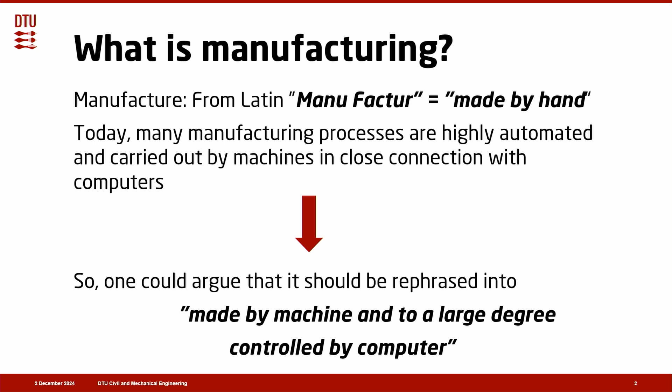Today, the title of my thesis is Multiphysics Modeling of Manufacturing Processes. And you might ask, what is manufacturing? Well, it comes from Latin, manufactur, which means made by hand. But today, you could say that many manufacturing processes are highly automated and carried out by machines in close connection with computers. So one could argue that it should be rephrased into made by machine and to a large degree controlled by a computer. So if we look at the overall manufacturing chain, we have the materials coming in to the left.

We have the factory or the plant, and then we have our final products. That's actually the overall value chain. In the factory, we have a series and chain of manufacturing processes composed of single process steps. And what we're frequently interested in is the correlations between what we can control, the process parameters, what we can measure, the process signature, and the final product quality. So it's all about getting those correlations to get the right products.

But it's not really only the correlation, it's also the causation. And for sure, there is a difference. This is, you could say, illustrated by this very nice figure. What you see here is there is a correlation between the worldwide non-commercial space launches that correlate with the amount of sociology doctorates awarded in the US. So when one goes up, the other one goes up. When one goes down, the other one goes down. So there is a correlation. So it could be tempting to say, okay, well, if we want more PhDs in sociology in the US, we just need Elon Musk to send more non-commercial rockets into space.

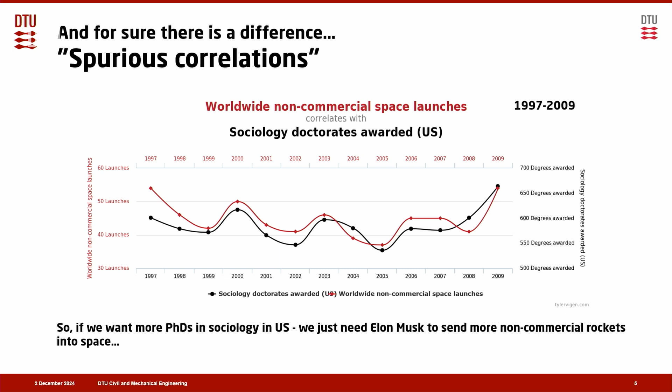That would be utter nonsense, because there is no causation. So the real aim is actually causation, but based on the knowledge of the correlation.

So mathematically, this is actually an inverse problem. What you see here is that the production goes from left to right. You have the raw material coming in, you have the production, and then you have your final product. But the design process goes from right to left, because you know what the product is actually.

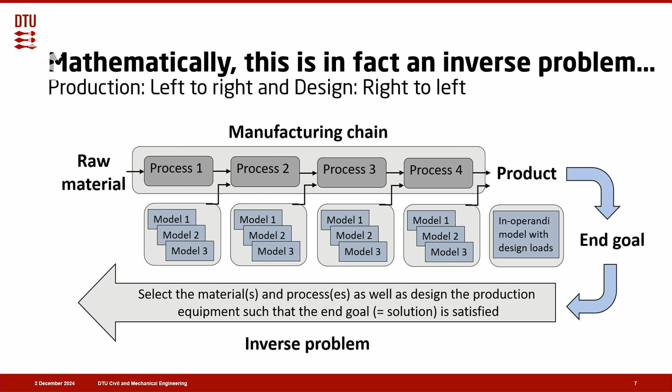Let's do it here. Is it able to point? Yes. We know what the end goal is, but we don't know how to make it. So when you design something, you know what it's supposed to do, but the inverse problem is to select the materials, the processes, as well as design the production equipment so that the end solution is satisfied. And that is mathematically an inverse problem, and that's what makes it difficult.

So what is multiphysics? That was manufacturing, now it's multiphysics. Well, it's numerous physical phenomena often taking place simultaneously in a coupled manner. So what you see here are some well-known examples of relevant physics.

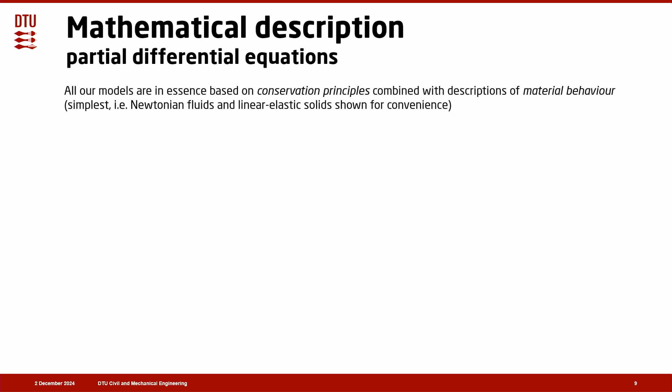So how do we solve this and model this mathematically? Well, we use partial differential equations. Partial differential equations are based on conservation principles, that is, in essence, balances together with descriptions of materials. So we have heat transfer conservation of energy, we have fluid flow conservation of mass, momentum, energy, and in solid mechanics, that's simple force equilibrium.

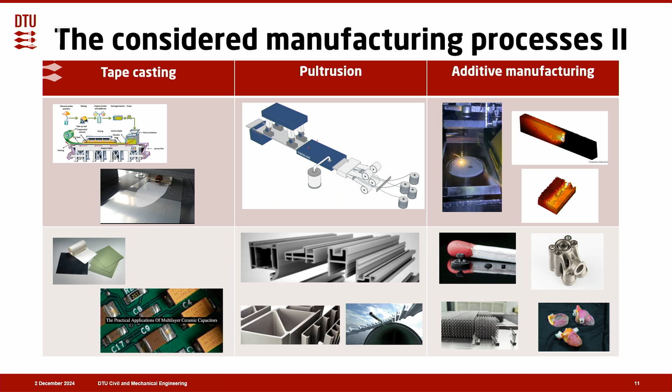Then we have tape casting, that's used for tapes used in the electronics industry. We have pultrusion, with some products below there, some profiles, and then you have additive manufacturing, also known as 3D printing, with some examples below there.

So how do we go about modeling this? Well, we use analytical and numerical methods. You start out with the partial differential equations, plus a lot more. Then you have analytical solutions with paper and pencil. You get some formula, you get some curves, and then you can actually derive whether it works according to how it's supposed to work. We also do numerical methods.

This is what this is about. There you type it, or you could say program it into a computer. You get numbers, and lots of numbers, that's why it's called numerical. And then you get curves and plots as well, but they are much more general than the analytical ones.

That's in essence what we do, and then we get tons and tons of equations that we solve, and then we can get the curves and color plots and so on. Something we always have to do is verification and validation. In verification, we ask the question: are the equations solved right? The only way we can test that is to compare with a well-known analytical solution.

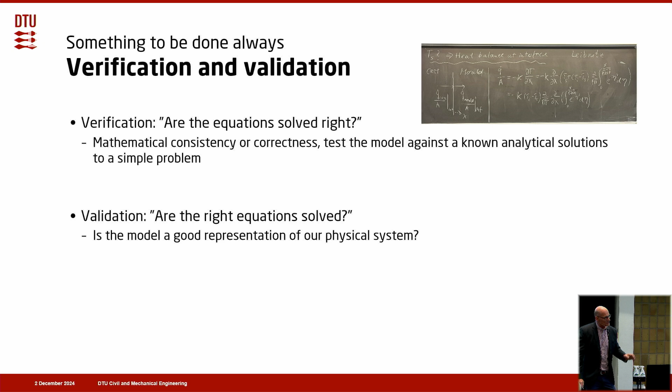We could predict the centerline porosities, and to some extent the segregation, using this kind of simplified model. People would know that solving Navier-Stokes equations is for sure not simplified, but this was at a scale where these phenomena normally don't take place, so it was actually simplified.

Then we did a multi-objective optimization problem where we wanted to get rid of those centerline porosities, but also make it more energy efficient. So we found the optimized layout. The weight of the molded material went from 60 tons to 46 tons. It was a success. It was test cast, and it showed no defects.

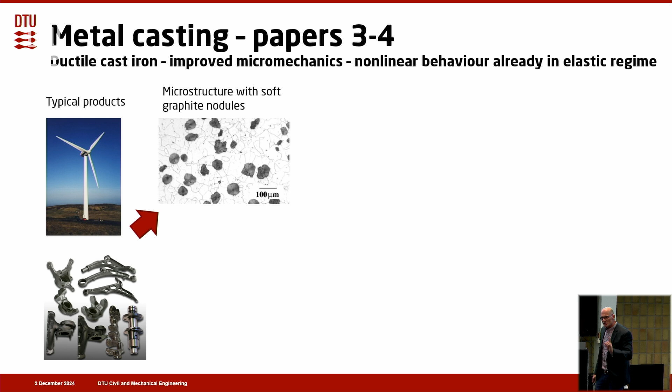The next two papers were about ductile cast iron and improved micromechanical models that could somehow address the nonlinear behavior already in the elastic regime. Here you see some examples of ductile cast iron. The microstructure contains soft graphite nodules, which are there for castability, but typically you don't assume they can carry any load because they're soft. So you just assume they are holes when you dimension the part.

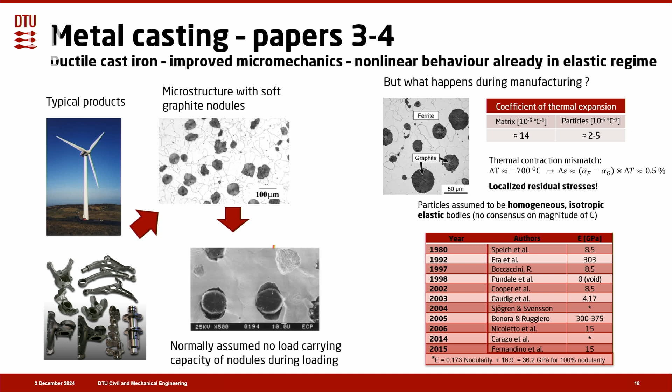But the point is, what happens during manufacturing? Because you have different thermal expansion coefficients of the nodules and the surrounding matrix, you get localized residual stresses, which is important for how it carries load afterwards. So people would normally look at those as homogeneous isotropic elastic bodies, but there was absolutely no consensus in the literature as to how to model the Young's modulus. You see it goes from 0 to a lot, and that's a big variation, I would say.

So what we did was look into the literature and examine those nodules. We found out they're not isotropic, but composed of conical sectors made of platelets. We proposed several divisions into conical sectors, and then we did a unit cell approach. This was our first model.

Making a more advanced model, we did a macroscopic casting simulation in MagmaSoft to get the cooling history, which is very important for the residual stresses. Then we imported the real structure from the test specimen, applied the loading history, and did a cross-section loading simulation in Abaqus. With that, we got a much more realistic description.

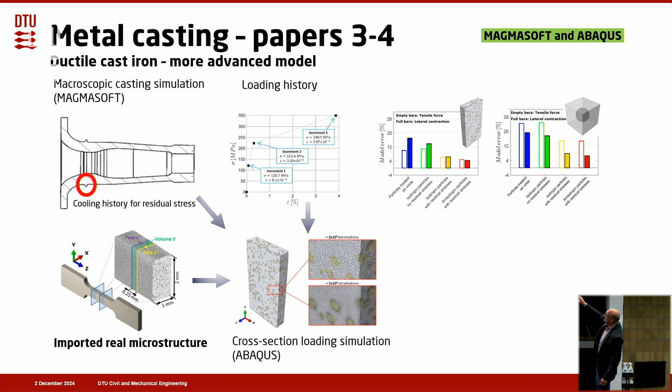So you can see here, if I can get it to work... Okay, anyways, you can see the figure to the left, the two reddish ones, they are around 3 to 4% from the experimental values, and this was with the advanced model.

What was really interesting here was that we could then provide the first theoretical explanation for the nonlinear behavior already in the elastic regime for this material. So you needed to look into the micromechanical behavior of the material to say something about its behavior macroscopically when loaded in real life.

So the next process was spray forming. Spray forming is a process where you have a melt, it's atomized, you get a lot of droplets, and then you build a billet.

With this, we could predict the temperature during flight, solid fraction over distance, as well as compare with experiments from secondary dendrite arm spacing. So this model was just the atomization model.

And we needed to account for shading with various geometrical considerations as well. That was rather involved at the time. And then we had this coupling between atomization and deposition.

You see some results here, building a Gaussian billet. This is where you have the atomization point right above where you build. Then you just get a Gaussian billet due to the distribution.

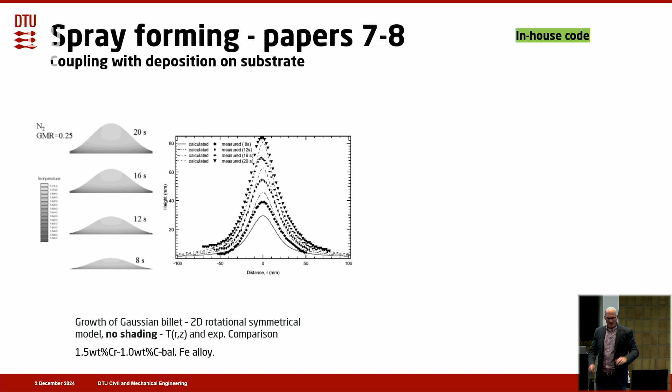Then we finally, in spray forming, did a model in OpenFOAM, which was a more advanced CFD program, where we looked at the calculation domain relatively close to the nozzle positions and looked at both primary and secondary breakup. Then we could make a simulation like this, taking turbulence with a k-epsilon model into account. This was a substantial improvement as compared to the literature at the time.

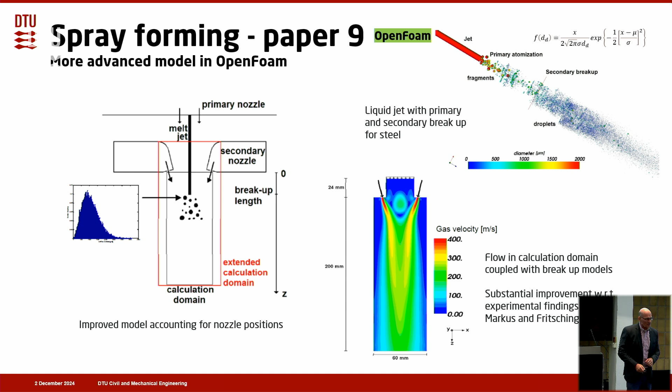Now we come to friction stir welding. That was this process where you have a rotating tool. It's a mechanical welding process, and then you weld the two parts together. Here you have an indication of the friction stir welding process.

We did a very fundamental analysis of the heat generation at the surface of the tool and the shoulder. Nobody did that in literature before at the time. So we defined a state variable: it was 1 when there was sticking, because the interface condition is extremely important, 0 when there was sliding, and in between a combination of the two.

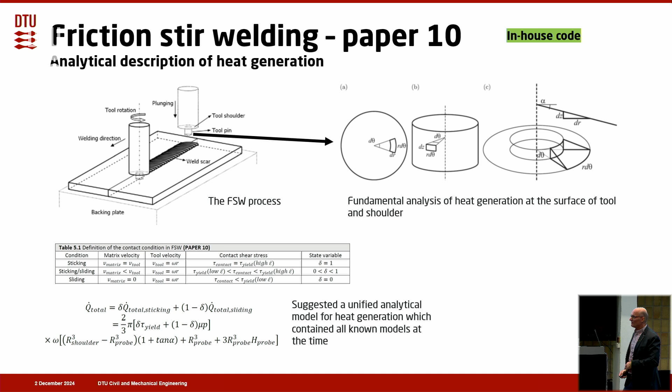And then we derived this analytical solution that was a unified model, and it actually contained all the known analytical solutions as special cases at the time. This was kind of taking them all into account because it was a much more general formulation. It was experimentally validated, and that validation suggested a close-to-sticking condition.

Then we did a CFD model. CFD, computational fluid dynamics, it's something with flow, right? And you might ask yourself, how can you make a CFD model for a solid yielding material? It's not flow. Well, it is flow in the sense that it's so soft that it flows.

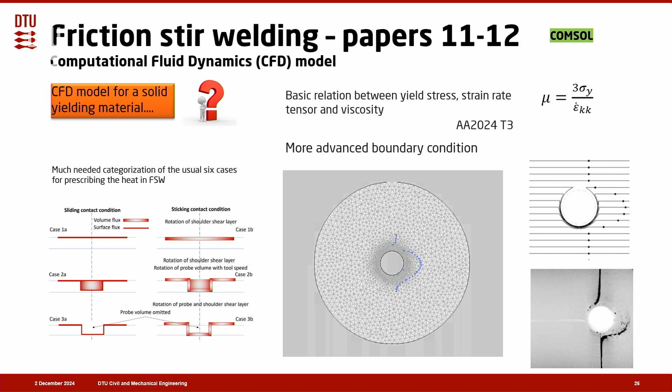You have the rotating tool, then you have the material coming to it. And then you see some tracer particles being swept around the rotating tool, and we can compare with experiments, and we found quite nice agreement.

Then we went to thermomechanical models. This is a classical quasi-steady state thermomechanical model with a moving heat source. This is quite standard in welding, you could say. But the trick here is actually to find the heat source, really to calibrate it.

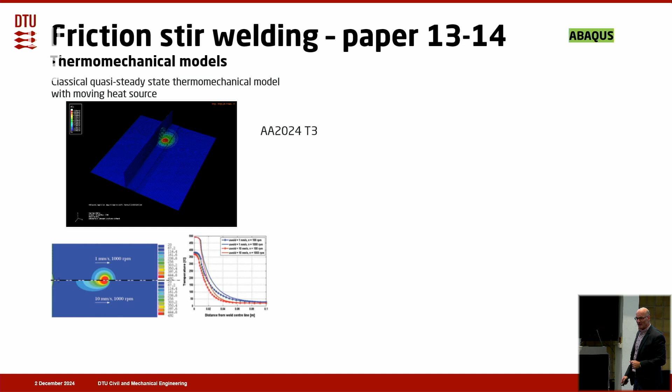So with this, we could make parameter variations where we varied the welding velocity as well as the rotational velocity. We could look at temperature fields, this is what you see here. And we could also look at the longitudinal residual stresses as a function of the choice of these process parameters.

These models are actually multiphysical. That means that they take a lot of calculation time. They are complex. So we tried to think, okay, can we make a simpler model? And then we suggested the thermal pseudo-mechanical model.

This way we bypassed the multiphysics, and instead of making an experiment so we knew the total heat generation, we tried to make it based on material information instead. So we made a model where the temperature-dependent yield stress was controlling the heat generation.

There is still some mechanical information in the model, but it's only a thermal model, which means that it calculates extremely fast. So we got almost the same calculation time as just prescribing the analytical heat source, but then we avoided temperatures over the solidus temperature, of course, because then it switches itself off.

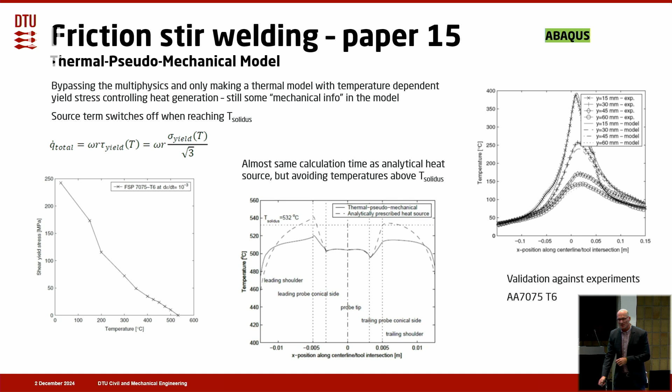And then we did some validation against experiments, and there was actually quite nice agreement.

So in friction stir welding, we also looked at the effect of softening on residual stresses. This was the quasi-steady state mechanical model I showed before in Abaqus. And we used a simple softening model by Myhr and Grong. It's based on dissolution of hardening precipitates.

And of course, the softening was obviously taking more effect during the hot conditions. That is, of course, expected.

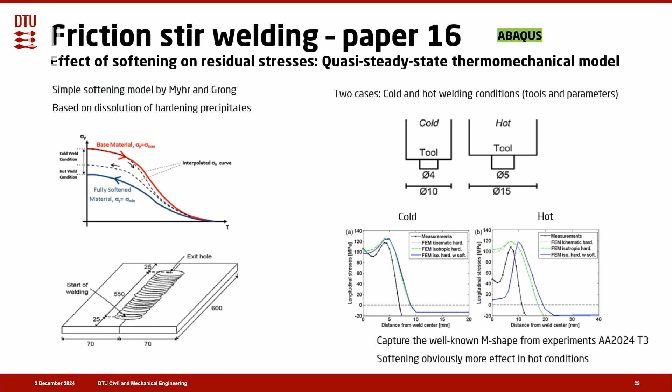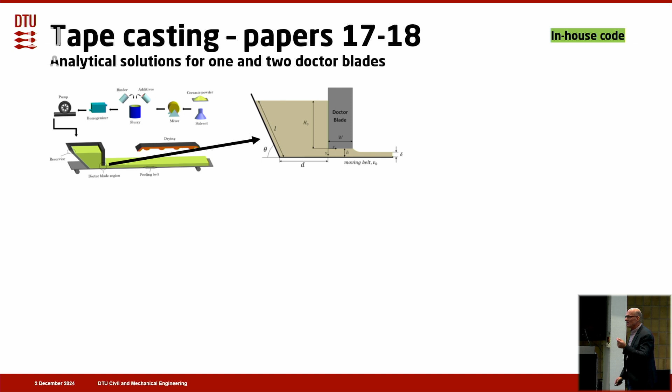What you're frequently interested in here is the thickness of the tape, because you want to control how thick it is, and that thickness you can actually calculate if you know the velocity field. Because if you know the velocity field, you can use the mass balance, the continuity equation, and then you can find the thickness.

So what we did was that we suggested a steady-state velocity field solution for a power law fluid. In literature, at that point, it was only Newtonian fluid that was suggested. So we looked at a power law fluid, suggested this. But what we also did was that we augmented this.

So it became a quasi-steady-state velocity field when the fluid height decreases. Because when the pressure height decreases, it will change the velocity field. So this we suggested as well, and that was really the novelty of that paper.

And we could actually get very nice results as compared to experimental findings. We also looked at two doctor blades, because with two doctor blades, this is actually where you can better control the height of the reservoir. And then we gave some contributions to the literature with the velocity field, also for a Bingham fluid.

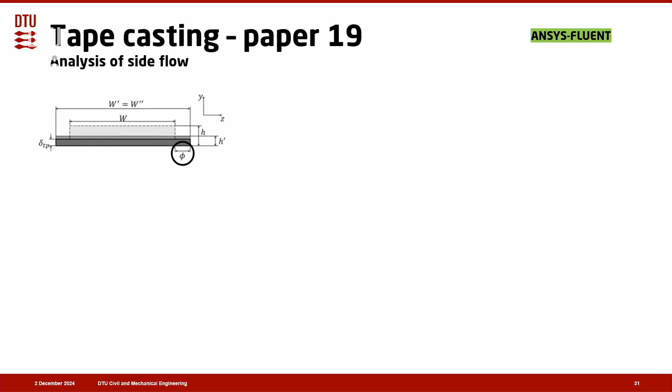We also looked at the side flow. A lot of people in literature talk about the side flow. So when it's flowing out of the tape caster, it flows a little to the sides. Some formulas were given in literature, but they were never derived. So we thought, okay, people were using these, but never told why. So we just made a small analysis as to why it actually looked like this.

And then we used a 3D CFD model in ANSYS Fluent to actually simulate the side flow. We compared against experiments for the side flow as a function of substrate velocity, doctor blade height, and initial slurry height. And we found very nice agreement.

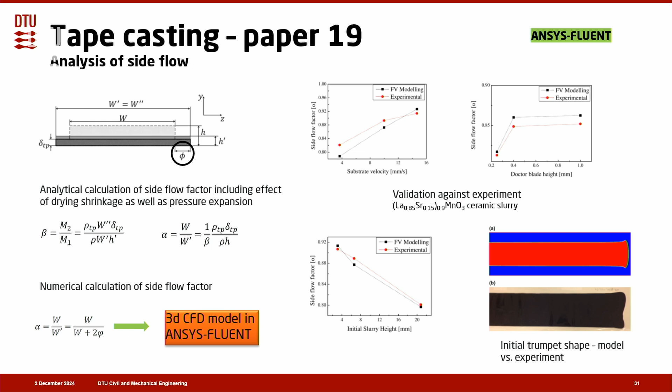And of course, it flows to the sides very much in the beginning because there is a free boundary very close. And then the final paper in tape casting was a simple drying model in 1D that was emulated by the water-ceramic system.

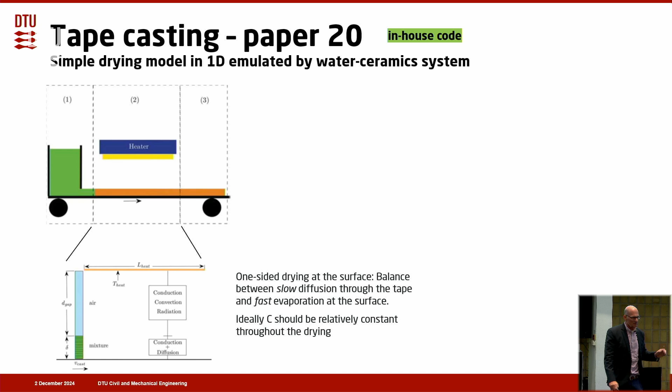So if you see here, the drying with the blue heater, the point is that it's one-sided drying at the surface. So it's a balance between the slow diffusion through the tape and the fast evaporation at the surface. And ideally, you would like to get a more or less constant concentration throughout the tape.

This is, of course, not possible, but you would like to at least get there to some extent. So we made a simple model for the heat conduction equation in 1D. This is what you see here, very simple. Then we got some temperatures. And then we also realized that the diffusion coefficient for the dry skin has a much lower diffusion coefficient than the wet material. Combining that, we could solve Fick's second law, and then we could get the concentration profiles through the tape for fast, intermediate, and slow drying.

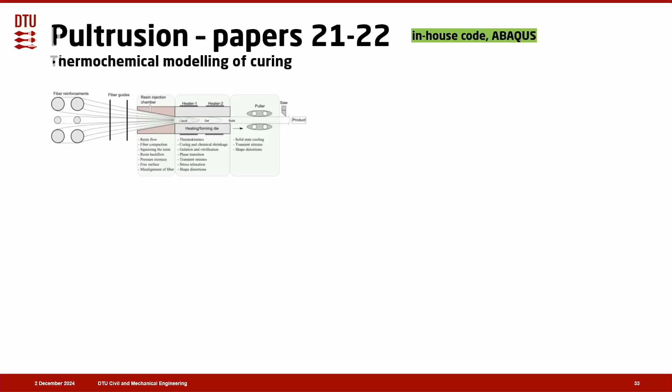Getting to the next process of pultrusion. Now, pultrusion is a very interesting process where you have fibers coming into a die, you add resin, and then you cure it, you kind of heat it, and then it hardens. And then out comes some profiles.

So we started with a simple 2D rotationally symmetrical model where we found the centerline temperature as a function of distance, as well as the degree of cure. And the degree of cure is how hardened it has been. That has to be around 0.9 or higher.

Then we continued with comparing some different solvers from literature, ADI, transient, implicit, steady state, and so forth and so on, to see what was the most efficient from a computational viewpoint.

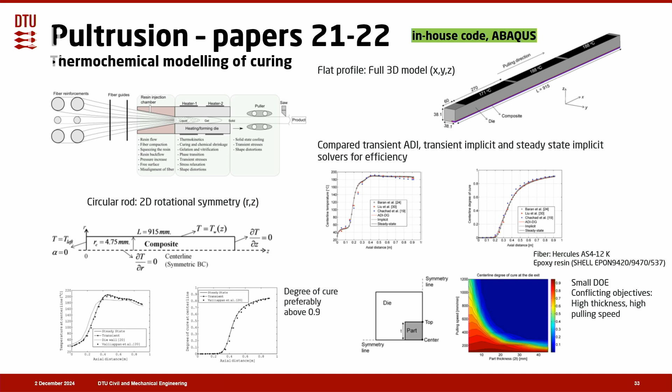And then we did a small DOE where we looked at how fast you can actually pultrude a part if you want to make it as thick as possible, but pull as fast as possible. And pulling fast, of course, increases productivity. But if you pull fast, it doesn't have sufficient time for curing. So, of course, these are conflicting objectives, and then we made this, you could say, optimization curve.

Then we went to the very first in literature thermochemical-mechanical model of pultrusion. Nobody ever did a thermochemical-mechanical model of pultrusion before, so we took the model from before, and then we took a 2D plane strain cross-section moving through the die.

Then we continued and said, okay, well, this was a plane strain. A plane strain assumption means that you get longitudinal stresses that are very high because they're constrained. So we looked at a generalized plane strain as well as a 3D model.

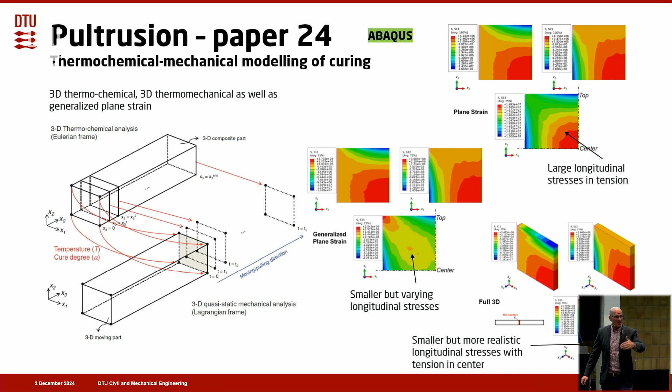And then we went to 3D. And here are smaller but more realistic longitudinal stresses with tension in the center. So if you want to look at not only in-plane stresses but also longitudinal stresses, the 3D model is probably preferable.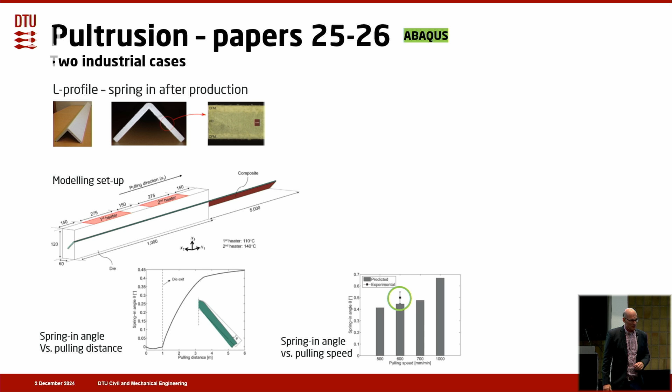So we could really use this thermochemical-mechanical model for predicting final deformations.

Finally, in pultrusion, we did a 3D steady-state thermomechanical model. The other models were transient, meaning time-dependent, which takes a lot of calculation time. So it's not difficult to make a steady-state model for solving temperatures, but it's more difficult

for making a steady-state model for solving stresses and strains as well. We were inspired by people from welding who did this before, and we integrated deformation rates along streamlines to get final deformations. This model showed the same accuracy as the 3D transient thermomechanical model I showed before, but it was calculating much faster.

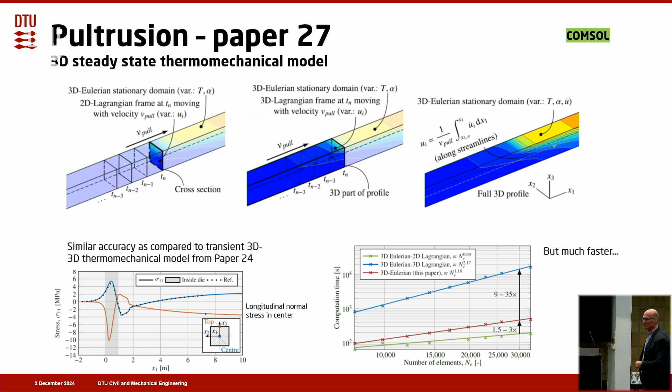So if you want this steady-state situation in pultrusion, and this is what you often want because it's a steady-state process, then you should definitely go for that. But if you have startup or stopping problems that you want to analyze, then a steady-state model is not sufficient. Then comes the final group of manufacturing processes: additive manufacturing, also known as 3D printing.

In the beginning, we made a simplified model for optimizing the scanning strategy of a 3D printed rod. When you 3D print, you have a laser, you melt some material, and then you cut it from the base plate. This was scanned using typical classical scanning, back and forth in squares or lines. You scan, scan, scan, scan, and then you cut it, and how does it look? It bends.

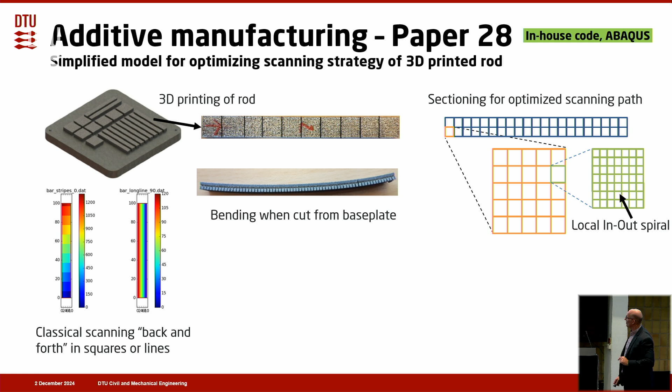So when it's cut from the base plate, that is of course a problem. So we thought, how could we actually scan in another way so that it didn't bend? We sectioned this part into different levels, and at the green levels there, we used the so-called local in-out spiral scanning strategy with the laser.

We made a simplified thermal model and compared it for the local in-out spiral with an advanced model in Abaqus, and we saw quite good agreement—not the same, but relatively good. Then we could use that optimized solver to ask the computer: please tell us how to scan.

Instead of just scanning like this, which makes it bend, please tell us how to scan so it doesn't bend when it's cut off. The one below the bending one was the one with the optimized scanning path, and it was as flat as when it was not removed from the base plate. That was because we could optimize. Not surprisingly, the optimized scanning path was scan a little here, scan a little here, scan a little there—this is called island scanning, because then they can contract independently instead of one long rod contracting like this and then like this. So it was not a surprising result, but it was still a very interesting one.

But this called for a lot of dedicated experiments, so it's not a general procedure. You could say we substituted some of the complex partial differential equations with empirical knowledge that we put into our reduced order model, which means it starts getting problem dependent. We probably could not have done that for a very advanced 3D geometry—we'd need to run all the experiments again and so on. That's why we moved away from this, but I think it deserved mentioning because it was a really nice optimization case.

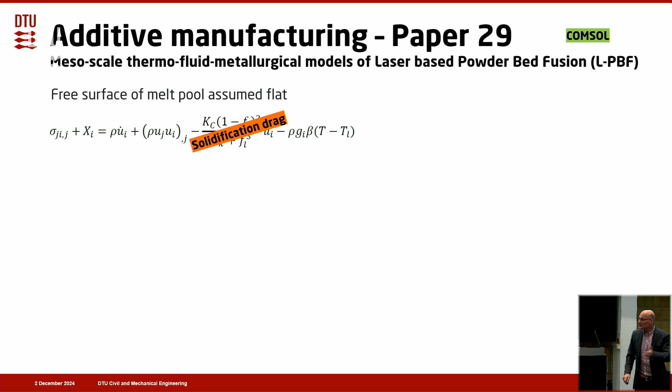So what we continued with was a mesoscale thermofluid metallurgical model of laser powder bed fusion. Here we have the momentum equation. We assumed the melt pool surface was flat, and also included the solidification drag and buoyancy. We suggested a new conical heat source distribution and could calculate melt velocities and temperatures. We compared and validated against a melt profile from literature, and got very good agreement.

We also analyzed the effect of excluding convection from the melt pool size. Of course, if you exclude convection, you don't have as much cooling as if you include it, and therefore the melt pool size increases when you only have conduction.

Then we proceeded with a mesoscale thermofluid metallurgical model. Again, it was actually the one from before, but we used it in another case where the energy intensity is higher. So this is where you get the keyhole regime.

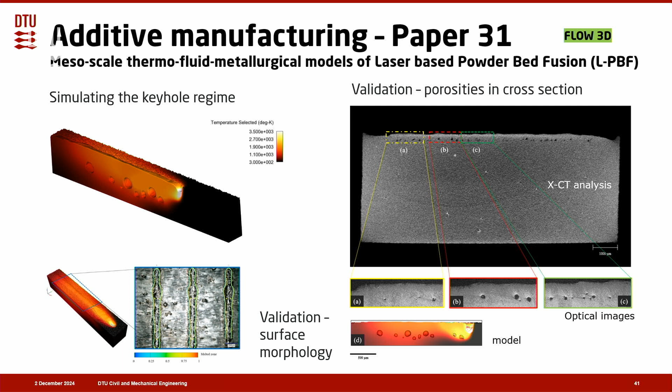Paper 32, coming to paper 32, was a part-scale thermomechanical model. Here you look at a 3D printing of one of these plates here in the corner. That's a rectangular plate. You have the actual scanning. And then what we used was a flash heating.

This is where you lump a lot of layers and activate them at once. This means that the calculation time is highly reduced. And we also suggested the so-called sequential flash heating. This is where you get some information about the scanning strategy taken into account. This also suffered from bending when it was cut off from the building plate.

So this is the simulation of this. And we could see here that when we used the flash heating, we got something that was almost rotationally symmetrical. But when we used the stripes in the sequential flash heating, we got something that was closer to the experimental results that was this. This was the one that was closest, of course, because it had the highest refinement.

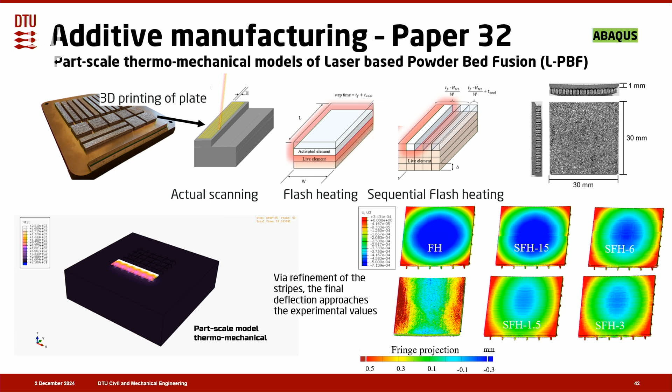So via refinement, we get better results. That's not surprising.

Then we looked at a cantilever beam that was heat treated. So we wanted to see the effect of heat treatment before removal from the base plate. We did a validation of the additive manufacturing simulation simply by just comparing the tip deflection of the measured part with the simulated part.

And they were quite good, so we used that additive manufacturing simulation for taking and transporting the residual stresses into the heat treatment simulation. And the heat treatment profile looked like this, with these material properties.

And these are the deformations after printing if you don't heat treat. And these are the deformations after heat treatment if you do, yes, well, heat treat. So we compared this, you see here, the tip deflection.

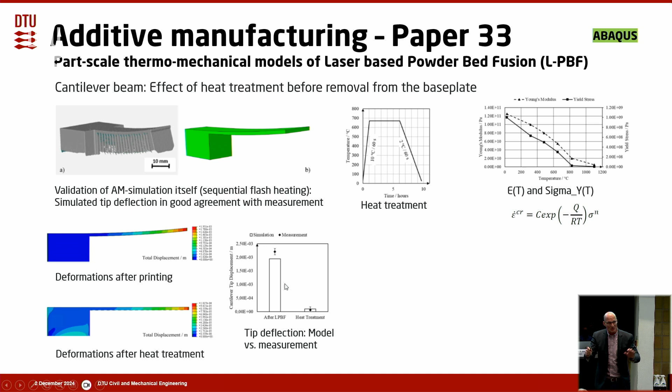This is after printing, and this is after heat treatment, and what you see here is the experimental finding, and we actually had a very nice agreement, and were able to predict that.

And then the final paper, I can assure you, so there's not that much left, paper 34. There we did a mesoscale thermofluid model of direct energy deposition, a somewhat other, you could say, additive manufacturing process.

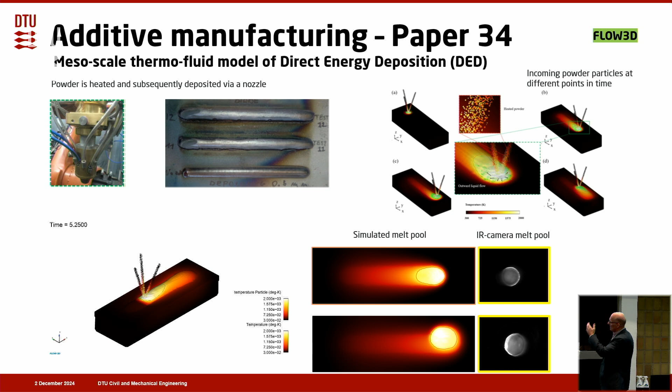This is pictures of the simulated melt pool. This is the infrared camera of the same.

And you see here at the bottom, you actually have made one scan, and then you're turning around and going back. So you, of course, get heat accumulation here at the start of the second track. That, of course, makes sense because you scan on already something which is already warm. And this is what we could predict here.

So these were the 34 papers, and I can see that at least some of you are still awake.

So we also did some review papers. These are not part of the thesis, but they are even so very important contributions to literature. One in friction stir welding, one in tape casting, two in pultrusion, and two in additive manufacturing.

So I'm coming to my conclusion, where I want to discuss a little about data. Now, there are a lot of people today that say data is the new gold. Data is the new gold. Once you have the data, you have it all. So this has kind of sparked or ignited a discussion between people who believe in data and people who believe in understanding physics. It's a little, you could say, I have exaggerated a little, but it's not entirely wrong, right?

So, I want to quote good old John von Neumann, who was a brilliant scientist. He said, with 4 parameters, I can fit an elephant. That's a very nice quote. But then he augmented it and said, well, and with 5, I can make him wiggle his trunk.

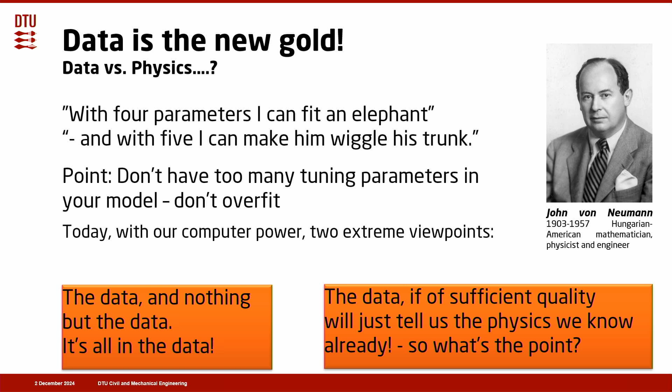But I think the point is we should combine data-driven and physics-driven models. We look at our manufacturing processes - these are a physical twin. We get operational data from sensors, our digital shadow, and then inductive models, which are data-driven models. But it could be like looking for the needle in the haystack - good luck with that. So I think we should combine with fundamental physics, based on first principles - these are deductive models. If we do that, we get efficient, fast digital models that can make way for real digital twins. So it's not one or the other, it's getting the best of both worlds.

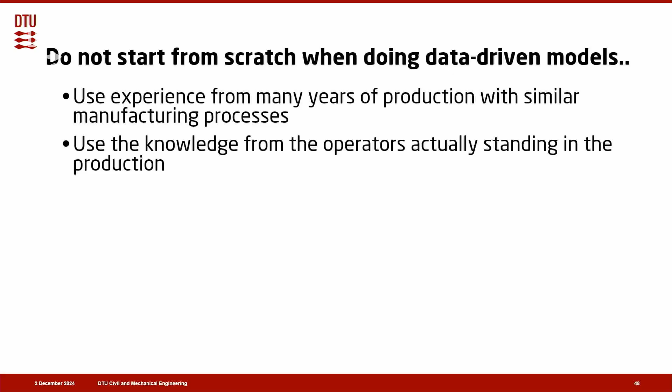When you do data-driven modeling, you should not start from scratch. You should use the experience from many years of production. You should use the knowledge from the operators actually standing in the production - that is really important. And you should use the knowledge from the physics taking place in the processes.

This could be simple analytical solutions based on otherwise very restraining assumptions - 1D, constant material properties, blah blah blah - but still they tell us trends. So we don't look for the needle in the haystack without an expectation. For example, if we scan faster in welding, the melt pool gets smaller. If we sand cast a thicker part, the solidification time goes up with approximately the increase in thickness squared - something like that. These are simple expectations our data should at least show something that reminds us of this. And of course we can also run more advanced software to make computer experiments, and these could also be the data, you could say.

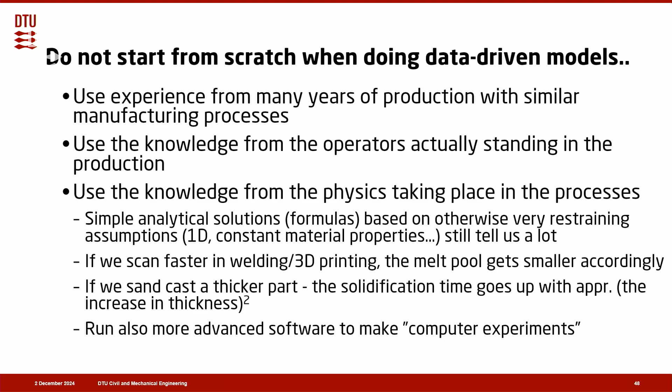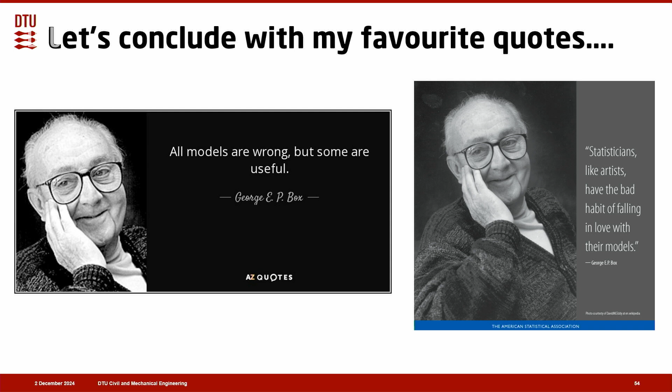So let's conclude with my favorite quotes. This was George Box, a late British professor in statistics. He said, all models are wrong, but some are useful. I love that quote, because this is exactly the point. But he also had another one that's not so well known, and I'd like to share that with you as well. He said, statisticians, like artists, have the bad habit of falling in love with their models.

And I would say this probably also goes for many DTU professors. I could be one of them. So my vision is that we combine usefulness with love, so that we actually only fall in love with models that are actually useful.

So with this, I would like to thank you for your attention.

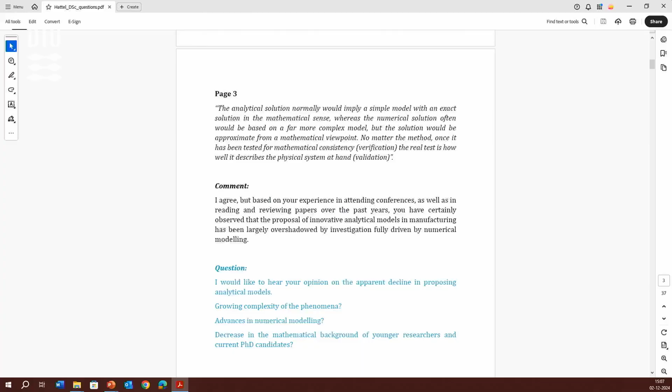Thank you. Now, I hope not to make a mistake. Oh yes, that's good, so now we go. This question here is maybe a little bit politically incorrect, but anyway, I think I should put it. So I like very much analytical models.

Yes, me too, because when you look at equations, you can feel the effect of the parameters instead of doing random simulations or whatever, right? Exactly. But I'm sure you agree that during the past years we see less and less analytical modeling being proposed. Perhaps the answers are in my questions, right? Is it because the phenomena we are analyzing are becoming more and more complex? Or is it because numerical models are so powerful that they don't provide fair competition with analytics nowadays?

Or the politically incorrect phrase, the last one, which is that, in my opinion, the mathematical background is unfortunately going down in many fields, with exceptions of course. I think all three answers or possibilities actually explain what you see there. I also love analytical solutions a lot, and you could say it's for verification. You need to check in your numerical model whether the equations are solved right, and the only way to check that is against an analytical solution. But that's not the only purpose. One of the slides I showed with data versus physics-driven models, in analytical solutions you already have a compact DOE, because if you change this and that parameter, you can evaluate immediately how that affects your result. This is why analytical solutions are so good to gain understanding of how the process actually works. So it is a combination of all three.

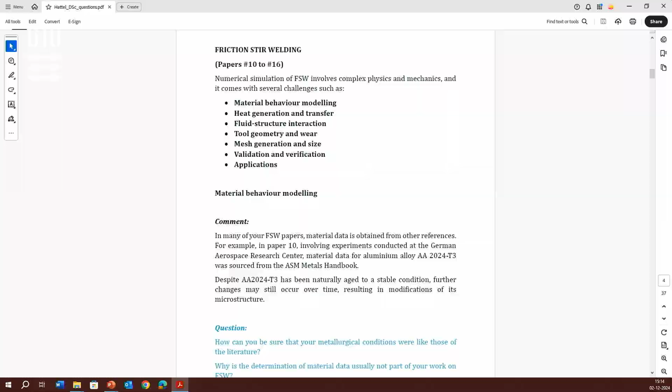That's true. I think the reason for doing this was that we entirely acknowledge we looked up a lot of material data from literature, because we wanted to focus on the modeling parts. That was a deliberate choice. But of course it has the drawback that even though we make a very advanced model that takes many physical phenomena into account, it still runs according to the GIGO principle—garbage in, garbage out. So if we don't have realistic material properties, that will be reflected in the results. But our aim was more to look at the literature and say, okay, what has been given as regards the more fundamental contributions in the modeling part. Which meant it was a deliberate choice that we didn't do an experimental campaign that would have been needed. So that's beyond discussion.

Yes, thank you. Now comes one paper I like very much—this paper on analytics of friction stir welding. I like very much the different zones of sliding and sticking, I really like it.

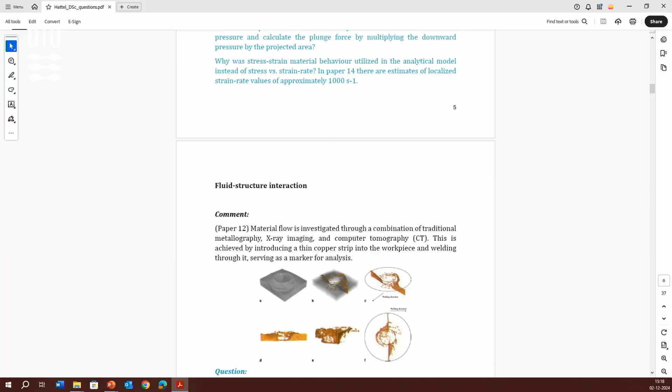So maybe I cannot go to all my questions because I will not have time. So I had a question here, but I'm not going to pose it. Just to say that this is a beautiful experimental paper. Yeah, I enjoy it very much.

This is not only a question, it's just a small note. It's not the volumetric strain rate, but the effective strain rate. Oh yeah, so there is a typo there.

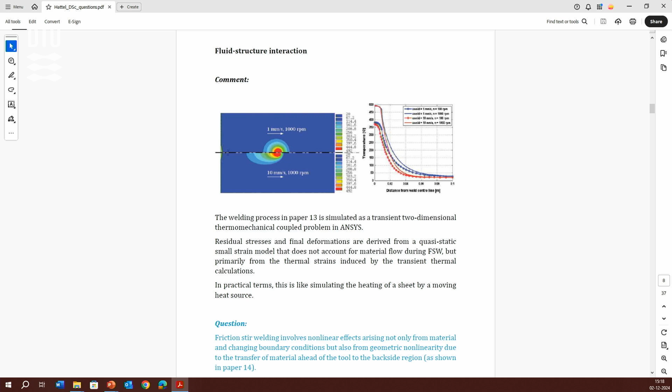Yeah, and now we come to this kind of simulations. We were talking a moment ago, and when we look at the work of 31 years, it's interesting, reading back the papers, to see how you evolve in analyzing the processes. You start with simple models, and then you make them more and more complex. Of course, that has to do also with the evolution of science, right?

But I want to go back to the first models, because although they are simple, the question is, can we still use them? There are limitations, and what is missing. So I went back to one of your models. This is basically simulating friction stir welding as a heat source, right? And you have some coupling with the mechanics, with the mechanical equations, right?

Small deformation. And I was not totally sure if this coupling was only at the end, or if it was during the process. I don't know. This was a one-way coupling, where we solved the thermal problem first, and then we loaded that into the mechanical calculation.

This was as opposed to the one where we saw the rotating tool. Yes, I will go to that later. Yes, because that was an ALE, fully coupled ALE formulation. Right? And that one takes into account geometric nonlinearity. Exactly, and this one only takes the material nonlinearity and the boundary conditions nonlinearity.

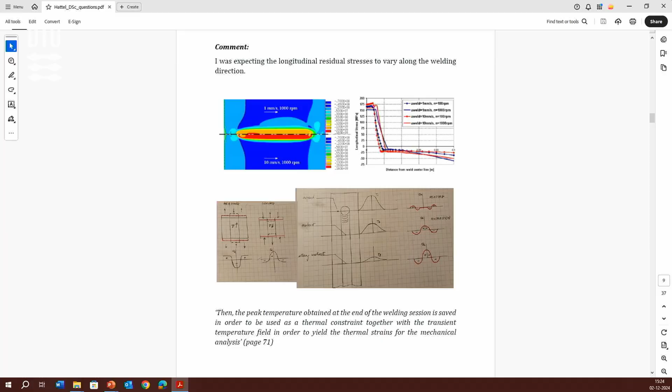But because of calculation time, what I showed there to the right was it was plunging, going down, and then moving a little, and then it died. Because it was 20, or 15-20 years ago, and that was so, you could say, demanding computation-wise.

But this is why you don't see something which is asymmetrical, because it's based on this, still new, you could say, heat source that was based on this analytical approach. When these papers were published, this was novelty. Definitely. I mean, we are analyzing 30 years, right? So that's the reason why it was symmetrical.

Of course. Yeah. Okay, so this is not relevant. This, of course, you already talked about it. Yes, I like this one a lot. I had several questions, but I would like to just focus on...

What do you think? Do you think there is some effect of mass scaling? Yes, we saw that. Because there is an effect I have of mass scaling - a fundamental problem about dynamic explicit.

I mean, of course, if you use a dynamic explicit method, you have a, you could say, a stability criterion with the CFL number and all that, the Courant-Friedrichs-Lewy number, and then in the thermal calculation you have the Fourier number, right? And they are kind of...

You can, in this case, overestimate the contact forces. But for sure, because when you do mass scaling, it's in order to be able to use a higher time step. Yes, but it's a very nice paper.

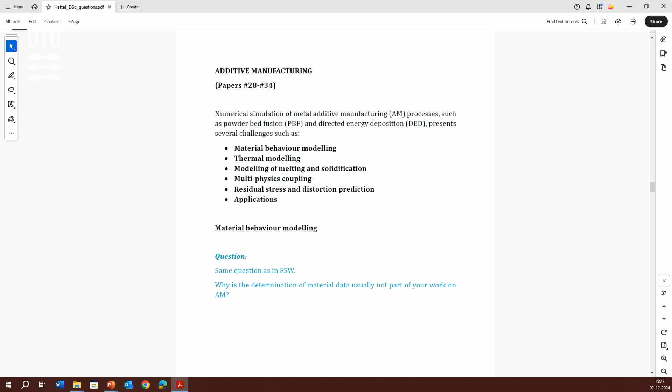Now we are talking about this pseudo-analytical method. I had a question about this, but you already answered it, because you said that when we go to complex parts, forget about this pseudo-analytics. So my question is out, I don't have it anymore. I actually have three slides explaining this pseudo-analytical method and would love to show them, because if you're interested in numerics, you can see how beautiful it is. But it's not general, for sure. The thermal part was relatively simple, a thermo-analytical model.

But then we needed the mechanical model, to say how severe is this thermal field when it comes to thermal deformations. There we did a lot of experiments. Sankhya, sitting over there, did very nice work with experiments and calculations to see how we can define a thermal fitness number that tells us how willing the material is to deform. That thermal fitness number is of course problem or experimental dependent. We tried to make it general, but if we were to build a very complex structure with additive manufacturing, using this method for suggesting the scanning strategy would probably not work. That's why these two questions are not relevant anymore, since you already addressed them.

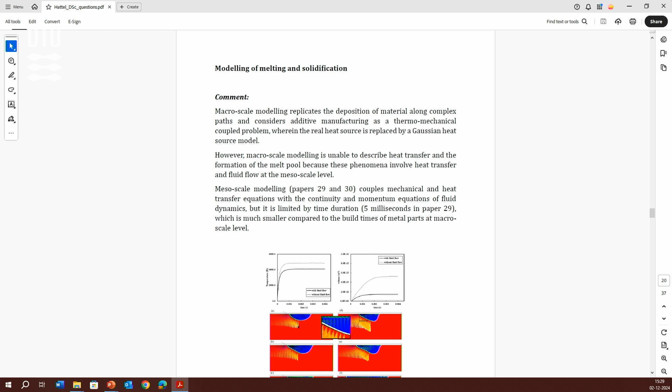Yeah, good. Now this is a part I am particularly interested in. Together with Chris, over there, we have been developing our finite element code for wire arc additive manufacturing, which is another category, a bit more macro, I would say.

I think that when I see the mesoscale modeling, and these papers I read from you, I learned two things. My concern is, mesoscale modeling allows us to model very small amounts of space and time, but with a lot of computation time, right? And of course they are relevant for understanding phenomena that occur inside the molten bead, because you cannot model them with macro analysis. Of course not. But from a manufacturing point of view, I would like to understand why there is a lack of communication between the meso world and the macro world.

Let me be a bit more clear. I learned from your thesis that if I do simulations without taking into account convection of the fluid inside the bead, I get an overestimation of temperatures. So I said to myself, okay, this is something I wasn't aware of. Probably in my macro code, since I don't have convection, the way to compensate is to increase the conductivity inside the bead. Exactly, that was exactly what I was going to suggest. Okay, this is what people do. Yeah, I understood. I found something in meso that helps me in macro.

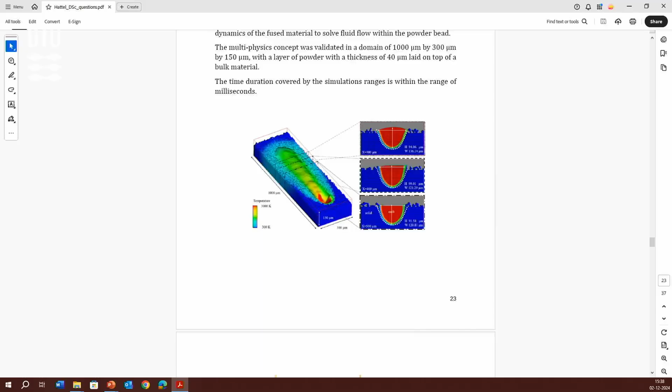Yes, and we compared with experimental observations. The problem is the CPU time, right? Oh yeah, it took forever. And the transfer between models, but it's a beautiful one.

And now we go to the macro, back to the macro of LPBF, right? Now I am happy working with WAM, because in WAM I can adjust the size of my mesh to be more or less compatible with the size of the drops. So I am on the same sort of scale.

A drop. Which process was that you talked about now? WAM, wire additive. Oh yeah.

Okay, yeah. So that is beneficial to my modeling, but here there is a problem because your depositions are very thin, right? So you cannot rely on your mesh, because otherwise, if you are meshing layer by layer, it will be a nightmare. Of course. So you need to do, and it's what everybody does, you need to accumulate some layers and accumulate some widths, right?

Yes, and there are two techniques. One is the flash heating that you explain in your thesis, that has difficulties, and we understand why, because everything goes like that. So for me, there is no gradient of temperature, and therefore the possibility of taking into account the direction of the deposition does not exist.

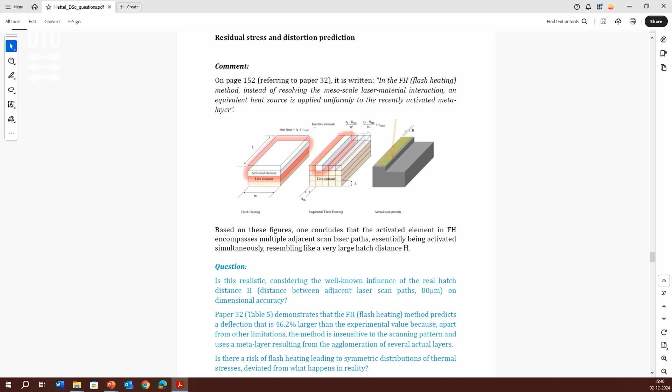Yes, and now comes the difficult question, which is you show that in this particular case, you clearly show that there are certain modeling sizes that work well and others that don't work well. Yeah, but the point is, how can we generalize this for a part where you didn't make the experiments first, right? I mean here, I can see that the 1.5 and 3, they work very well.

Yeah, but is this telling me that if I use sequential flash heating with laser powder bed fusion, should I rely on 1.5 or 3, or is this part dependent? What is your vision about that?

I would say that's a very good question. It's very difficult to answer. I would say that the purpose of this paper was, first of all, to make some more fundamental analysis of the time frame during which we have the flash heating turned on, because it means a lot for the residual stresses and the plasticity that takes place.

Yes, because some people use gradual heating. I mean, what you need to do is say okay, flash heating, and then we have the real process, and then we have the scanning, and the energy should be the same. Of course, yes, that's point one. So the energy should be the same.

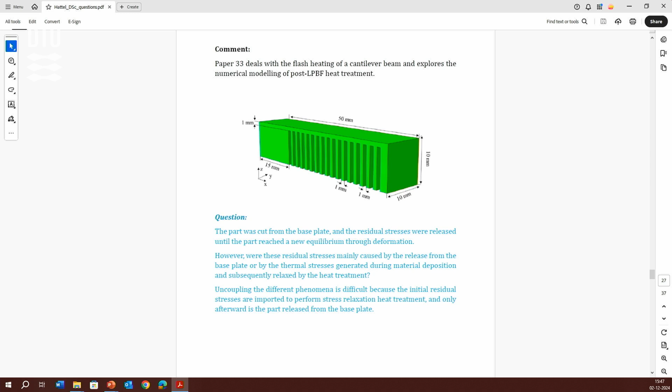Because with the experiment, with the experiment of the tip deflection. Before releasing. Okay, and then you compare after releasing again. Okay, so that was my question. Okay, that was the way I would do. Yeah, okay, good, okay, good. Very good, very good, okay.

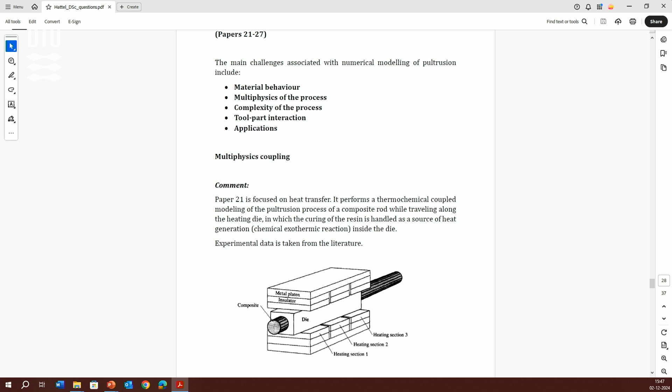Oh, sorry, yes, now comes pultrusion, which I must confess is a process that I am not very much familiar with. So I think, again, those are the topics, but maybe I'm wrong because I'm not very much familiar with this. But maybe your paper 21, which is the first one, is based on this. You were compared with some paper on the literature data, which was this one, right? Yeah, and I can't remember the author, Valliappan or something like that. Yeah, something like that. And then you made a model like this one, right?

Yes, now I have a couple of questions here. As you said, and in the paper of Valliappan, it doesn't tell exactly where the heaters are. No, exactly, yeah, so there is nothing said about that, just the temperature, which, I mean, a paper should be replicable, and it doesn't provide information for others to replicate the work he did. So we know the temperature, but don't know exactly where the heaters are. Of course, and then we did an inverse analysis to see, okay, where were the heaters, what was the temperature, and that was kind of the idea with that paper.

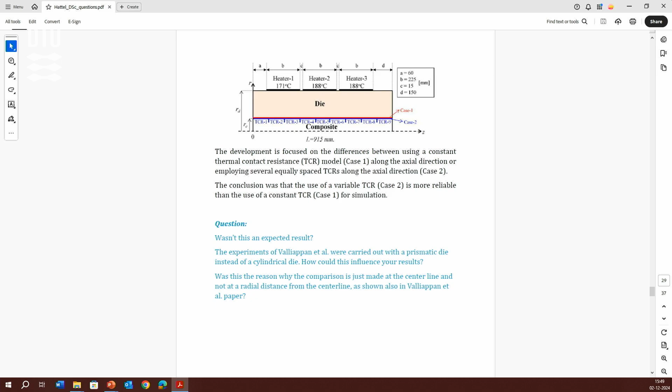Yes, and the point is, of course, you simulate in 2D, right? In the axisymmetrical one, which is not exactly, and maybe that's because of that, you only compare in the center line and not away from the center line because maybe you had some border effects, maybe, I don't know. Now, the point is, when you do the inverse analysis and you get this very good correlation, it's excellent correlation. My point is, is this the only possible solution for the position of the heaters? Of course not. Okay.

Yes, I am happy with citing good old John von Neumann: with four parameters, I can fit an elephant. So that is one possible solution. Oh yeah, one possible solution.

It was in order to show this was an example in literature that nobody else did. And that was kind of the novelty, but we didn't claim that this must have been the solution of the position of the heaters.

No way. An inverse analysis is, of course, like an optimization problem, where you minimize, you could say, a difference between experimental and modeled results. A lot of combinations can lead to equally good results. This is one way of stating an inverse problem, right?

Because what you show is that if you use just one thermal resistance, you go nowhere in terms of comparison with results. Yes, and that is expectable.

But this is actually, and that was the reason why this had novelty, because this was what people did in literature. They only used a constant heat transfer coefficient at the very length of the die, meaning that the thermal resistance was constant. They did not even take the die into account, because that was a boundary condition on the composite. But that boundary condition could be seen as a prescribed Dirichlet condition, or seen through a heat transfer coefficient. And what we wanted to show in this paper was that assuming a constant heat transfer coefficient along the entire length didn't make any sense.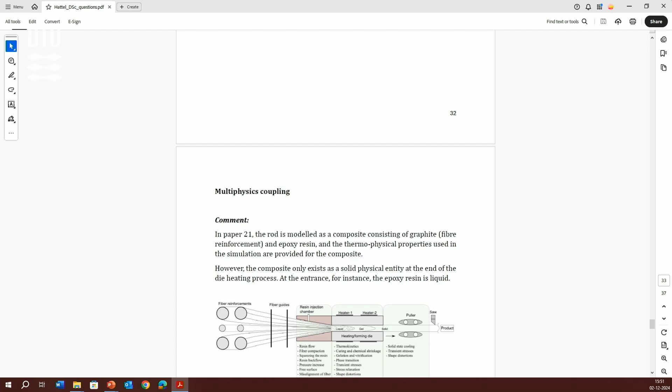What was igniting this paper was that there were some people in literature that compared a standard extension of the 2D ADI thermal solver with a 3D finite element solver. And a standard extension of the 2D ADI solver makes absolutely no sense, because it's only conditionally stable.

And you did it in a different way. And then we took the right one, which was the Douglas-Gunn one, and then we showed that this was actually faster than the finite element model. Because you compare with this paper from Careto, I think.

Carlone, Canon, or something. Carlone. And they compared those on unequal terms, so that was, I would say, close to nonsense. Of course they would find that this 3D extension of the symmetrical ADI would not match a finite element.

So we wanted to show that this could be done, and actually the right way. Okay, so now it's just a comment. You see, as I told you, your processes, the way you handle them, they have a history, right?

You start with more simple models 30 years ago, naturally, and then you go more complex. And in most of them, you jump into meso, right? Yes. And my question is, why didn't you consider the meso inside the resin injection chamber? Yes, in this process? Yeah, that's a good question.

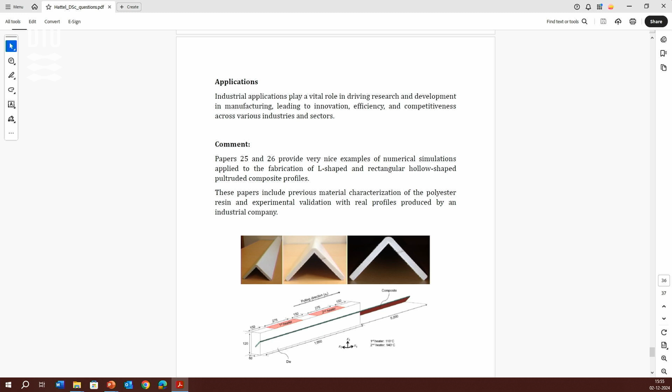I like very much papers 25 and 26. I really like them because they go from the modeling to the industrial application, and they are very interesting papers, and the results are very good. So I enjoy very much reading these two papers. And thank you very much. I enjoy reading the thesis, but these two papers of conclusion, I really enjoy a lot.

Okay, so I came to the conclusion. Well, I have this here, but let me summarize. Of course, this is a very excellent work, with underlying knowledge about physical phenomena of different manufacturing processes, and giving important contributions to the advance of science and technology of manufacturing. And the coupling with multiphysics, it's not easy, and it's not everybody that can do that. So you need to be someone exceptional to make this kind of coupling, and I give you my congratulations on that.

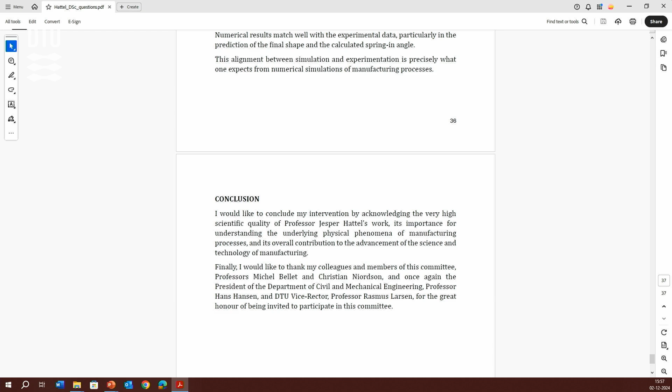Thank you. And finally, once again, I would like now, I will make the thankings in the reverse. So I start by thanking my colleagues of the committee and Professor Hans Hansen for the invitation. And finally, Vice Rector, Professor Larsen, for the invitation of DTU. It's quite an honor to be here today, which I will take for extending my staying, to stay with my friends until Saturday. So thank you very much, and very excellent work. Thank you very much.

Yeah, you can. Sorry. Thank you.

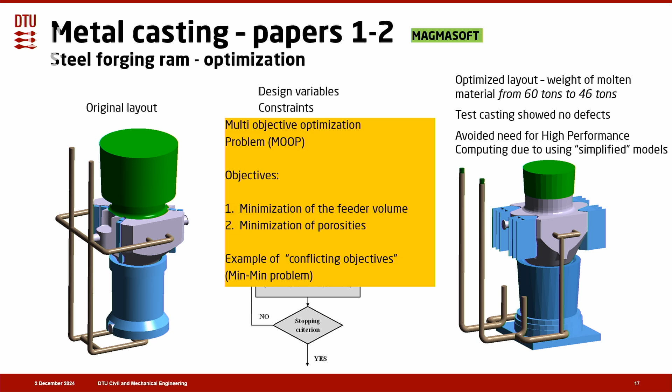And then doing the optimization, we switched off the fluid flow simulation. Yes, of course. So we only did the thermal simulation. And that was interesting. So we did a number, I don't know how many hundred or whatever, 50 or 200, of thermal calculations, and then we found the optimal solution there. It went from 60 to 46 tons. And it was cast by Vitkovice heavy machinery, a huge, humongously big plant in Czech Republic.

And then it showed no defects. That was really interesting. And then we took Magmasoft afterwards and did the fluid flow simulation again to check the one that was optimized only based on the thermal field, and we saw that we got a lot less centerline porosities as well as segregation. So that was a kind of validation with the reduced order model, but not the totally reduced order model.

That was because that was the thermal model, right? Yep, yep. So that was absolutely necessary for optimization to proceed with this reduced order model. Yes, because otherwise, think of modeling this with the macro model and doing all these scenarios, it would have taken 2 years in CPU time, right?

Okay, so now I think that we should take care about what we call a reduced order model. Yes, because in the computational community, reduced order model has a specific meaning. It is when you have a complex computational model and you proceed to POD decomposition, proper orthogonal decomposition. It means that you keep the complexity of the model, but if you proceed with finite element, you change the interpolation basis in order to get a reduced stiffness matrix and to solve faster. But you didn't lose any complexity. What you call a reduced order model on your side is not exactly this.

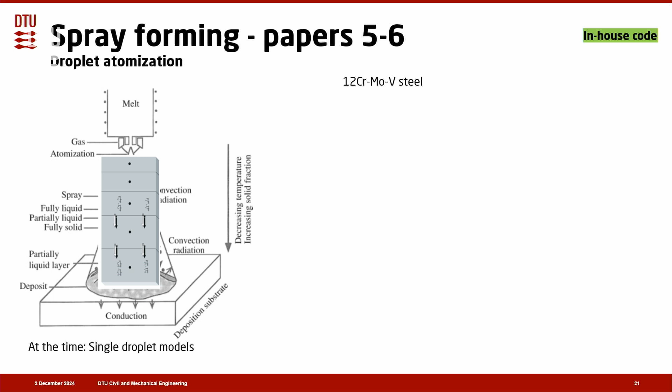But if I tell people that I do additive manufacturing, and then they ask what you're doing, and I show them this, they would say, what the hell are you talking about? So that's why I haven't called it additive manufacturing. But you're right, it is an additive manufacturing process. Yes, that's true.

Especially if we compare the latest stages of development you have shown for spray forming deposition, and if we compare with the DED simulation you have shown, it's exactly the same. Yes, and I actually refer back in my thesis, in that chapter, to the same two equations here, for the droplets, particles in flight interacting with an energy source. Yes, that's the same thing. That's true, so it's nice to have this picture here.

So you're right, it is an additive manufacturing process. But people wouldn't call it 3D printing. Yeah, it's not 3D printing. Definitely, now we say 4D printing. Whatever, yeah, okay.

So the innovation was, as you explained, that the interaction between the particles and the gas was more developed than in former models. And even though this was a one-dimensional approximation of the spray cone, it doesn't expand that much, so that was actually okay. And when we compared with experiments, it was relatively good.

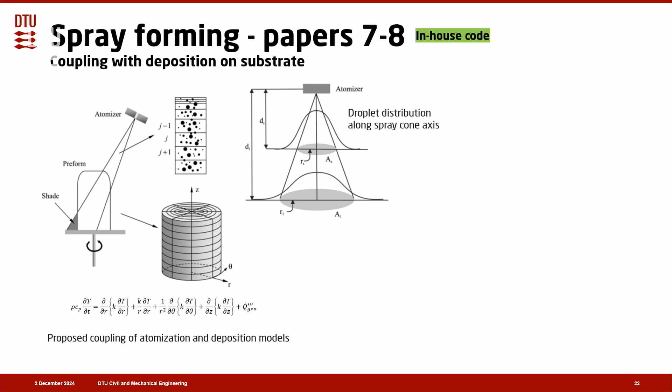The link is that, perhaps it's not that well described, but here we look at single droplets and also distributions. We said that this distribution of droplets is different if we look at a distribution just below the atomization point, which has a higher mean diameter than outside. So we took this one-dimensional model and sent all these distributions through it, assuming that some of the distributions at the center have a higher mean diameter than outside. So they were still interacting with one another in the one-dimensional mesh, but we had the effect of smaller particles at the outside being more represented rather than at the inside. That was a way of emulating a radial dependence.

I had a question on the interactions between the particles, because you don't comment much on that. No, and of course in these models the particles only see one another through the gas, thermally speaking. And then they are accelerated in the one-dimensional momentum equation we see here, which in essence is just Newton's second law with a drag term, and then that's it.

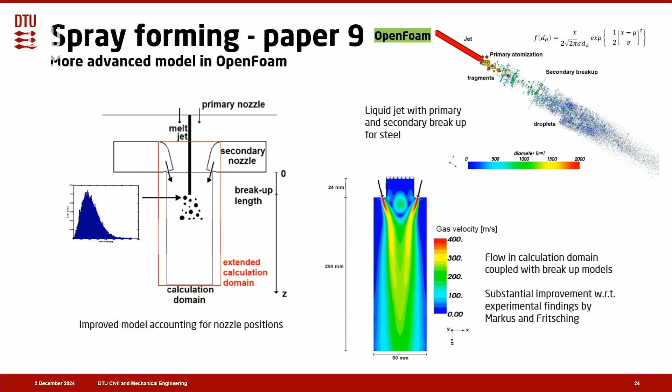Okay, well maybe we can move to tape casting. I don't know where we are regarding the time. Still 10 minutes. Aha, okay, tape casting - just for, well, I think we all appreciate analytical equations.

Yes, so it's really one or two papers, I don't remember exactly, but these are very nice papers developing differential equations. So I agree with the fact that, for sure in France, I don't know in Denmark, but the PhD students are less comfortable with differential calculation. Yes, I think it's the same all over the place. Yeah, but it's very nice what we can deduce from simple analysis.

I was surprised because it is for slurries of ceramic materials. Yes. And then you started with Newtonian. It is non-Newtonian, but okay. And then you moved to Bingham. Yeah, but was it the same family of slurries? Because these two material descriptions are - is there a real threshold?

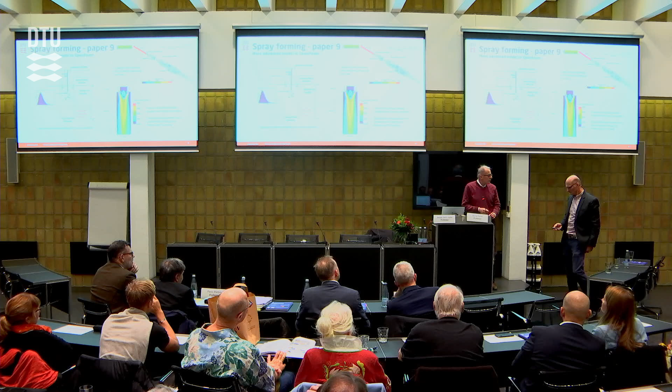So if we can come back, I have just a comment on the first paper, which was the beginning, at the beginning of the thesis of Mohamed Bayat. Oh, the first paper on the conical source. Yes. So here we are, this one, here we are, okay, so that was...

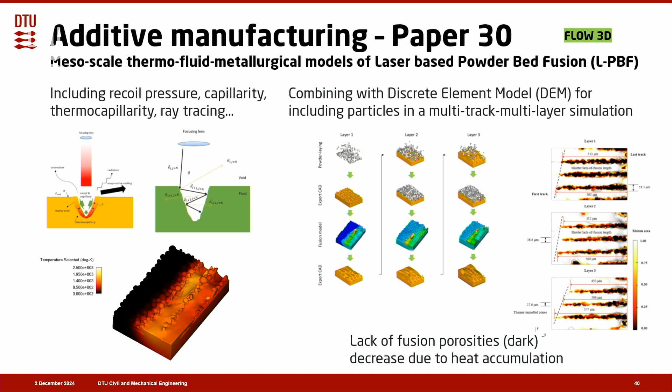Of course, then that would be relevant. Then we can see, as compared to the latest results you have shown, the surface is flat and so on. So this was much more advanced.

What is also surprising, because when you speak about the boundary conditions you prescribe, you speak about the Marangoni effect. Okay, if you could come back on the slides before. So there is the flat surface. You have to prescribe tangential stress, and then you say, well, I need to prescribe this force in a certain thickness. I think we did it as a volume force, but very thin. I think we did, but I don't exactly remember.

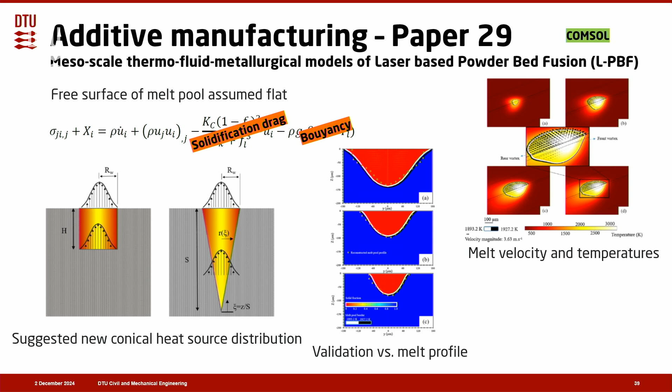Because it is a surface tension, of course. It is a surface tension, sure, but if the surface is discretized, as it is here, it is the real surface of the mesh. Then you can implement directly a tangential stress, you don't need to implement it in volume. But I think after, when you work with Flow 3D, with VOF methodology, then it's a surface tension, and you have to convert surface tension into a volume force. Yes, and this is what you are discussing here, right? Exactly, yeah, exactly, okay.

I think, I don't know whether this was Flow 3D. Yes, that's Flow 3D. So the results are, I think the other one here was COMSOL. I had some questions on ray tracing. You say, well, we proceeded to ray tracing, but that's not so obvious in such conditions because the keyhole is not that stable. No, you can definitely say that, it's very unstable. So ray tracing here is simpler compared to general ray tracing because the rays are oriented, and then we study the multiple reflections of each ray and so on.

Do you proceed to this analysis at each time step, or is it time consuming? Could you comment on time consumption for ray tracing, and how many rays did you have in your discretization order of magnitude? Yeah, I simply don't know, I don't remember, but I think it's every time step.

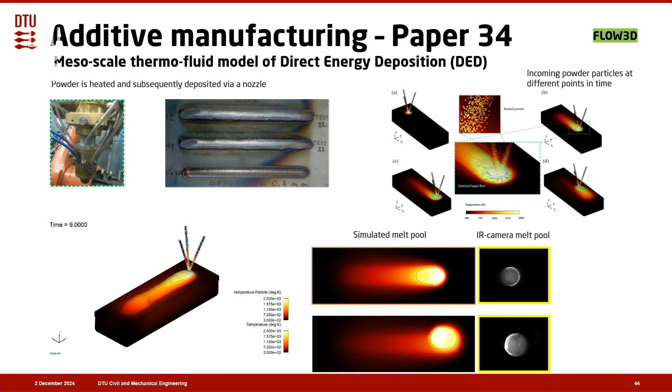But again, this was one of the first models of its kind in the literature, so we had to make some assumptions in the beginning, including assuming the velocity was just prescribed. But you're right, that's definitely one area where we could start improving the model. It will definitely increase the CPU time, beyond discussion.

So what would you say to conclude on that topic, to develop a macro-meso dialogue? Is it something important for you, and what do you think should be done on that? Yes, then I can perhaps get something out of the extra slides that I actually prepared here.

Where do we have those? Extra slides here, do we see them there? Yes, and then, is it this one? Yeah, so I'll have to find it, it's one of the last ones. I don't know whether I can, there were so many.

So, I think it is actually, you could actually say this one to some extent, it's also in the thesis, right? But this one, because this actually addresses what you're asking.